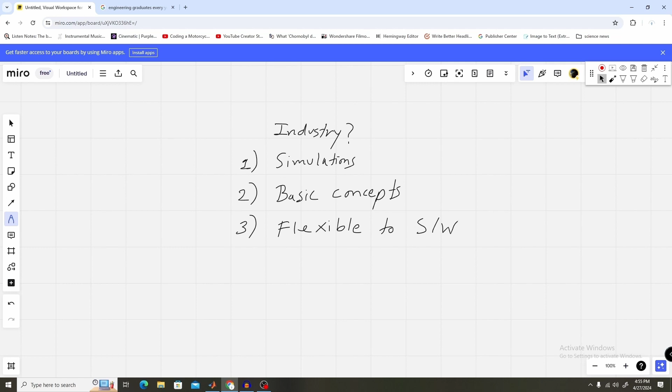Industry wants people who can do simulations. Industry wants people who can understand basic concepts. Industry wants people who are flexible to learn any software needed for that industry. So how can you achieve these concepts, and why is the current education system not able to deliver this to pass-out graduates in engineering?

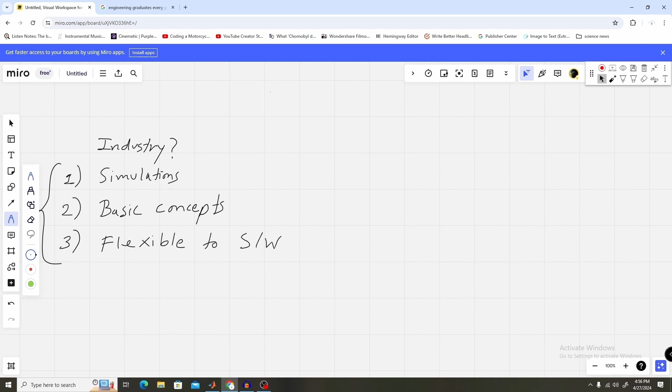For that we need to see what is lacking in our education system. First, simulation is not given that much importance in academics. Whenever we are taught simulation in engineering classes, we are made to follow just some predefined practical things in the labs.

Generally, students copy each other's practicals or their seniors' practicals and just pass out. But they don't understand the importance of that simulation or how it is used. They just consider it a software which has no importance at all.

In the education system, we need to put stress on simulation—how an engineer thinks and does simulations—that they need to understand first. Second thing is practicals.

In engineering classes, most of the time practicals are performed before the theory is completed in class. So the student doesn't know the theory behind whatever practical he or she is doing. How can they comprehend the concept if they don't know the theory?

Third, practicals are not taken seriously. Generally, in machines class, there are groups of students doing a single practical. Out of that group, only one or two students will do the practical and the rest will just follow. In such cases, how can we expect that everyone understood the concepts and did the practical seriously? Seriousness of practicals is much needed in our education system.

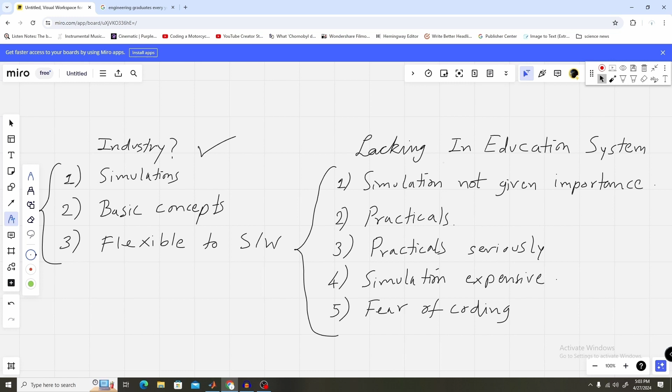The theme of our video is: first we will see a little bit of theory, and then we will implement it in simulation. This series will be part of electrical engineering. I will cover many concepts of electrical engineering in this series, and I hope you will get along with it and be strong with the basic concepts.

In electrical engineering, we say there are two types of currents: one is AC and one is DC. AC, what we call alternating current, and DC, what we call direct current. So how can we understand this concept? What is AC current and what is DC current?

We will understand this with a very practical point of view. Suppose you have a socket, so in home there is a socket or 3-pin plug. What do you get from this 3-pin plug? You get AC voltage. And suppose there is some other plug with two terminals, one positive, one negative, so here we are getting DC voltage.

So in the AC socket, what are these 3 pins? The above one is earth, and below, two pins, one is phase and one is neutral.

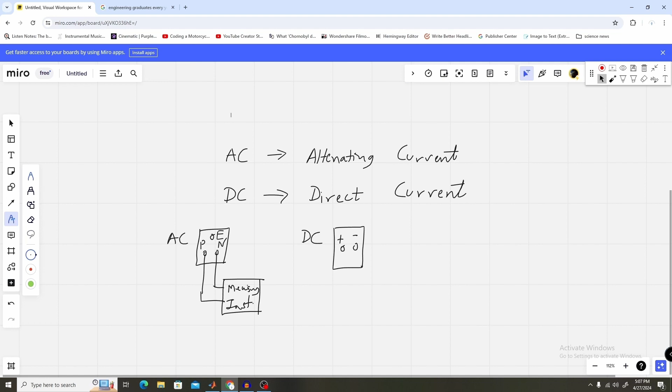What we will do is put some kind of measuring instrument here. This instrument will show us what type of waveform we are getting at this terminal. Similarly we will do the same for the other, so this is some measuring instrument, and here if we see, this is the screen of that measuring instrument.

So what will we get? We will see a waveform that is oscillating along the x-axis. This is the voltage waveform which we are getting between the P and N terminals. Similarly, if we see it here, what will we get? Will we get a waveform? No, we will get just a straight line.

In the DC socket we will get just a straight line, and in the AC socket we will get an alternating waveform, or in terms of mathematics, this is a sine or cos waveform. Here the x-axis is the time axis, and the y-axis is the amplitude, so the amplitude of whichever quantity.

So here, what is the quantity on the y-axis? It is the voltage. Here it is AC voltage and here it is DC voltage. So this is the maximum AC voltage, and this has a frequency. How do we define this? We define VAC as Vm sine omega t, where omega is 2 pi f, and f is the frequency.

So what is the frequency in India? It is 50 Hz, so this alternating waveform is at 50 Hz. And what is the voltage which we are getting? We are getting 230 volt. Similarly, DC doesn't have any waveform, it just has an amplitude, so this amplitude will be whatever voltage we are getting here — it may be 10 volt, 20 volt, whatever voltage it is.

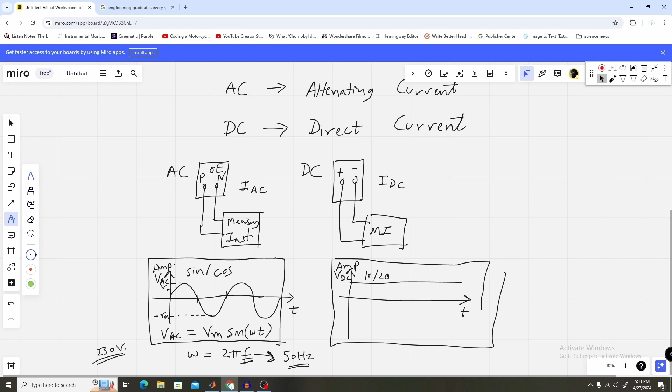Now let's turn to our simulation and see how this AC current and DC current looks like. For simulation, we are using MATLAB software. MATLAB is the matrix laboratory, so here each and every variable acts like a matrix, and we can do very huge computations using this software.

This is called the command window where we can write commands, but for now we will work on Simulink. Simulink is a part of MATLAB, where we can do simulations of different electrical systems.

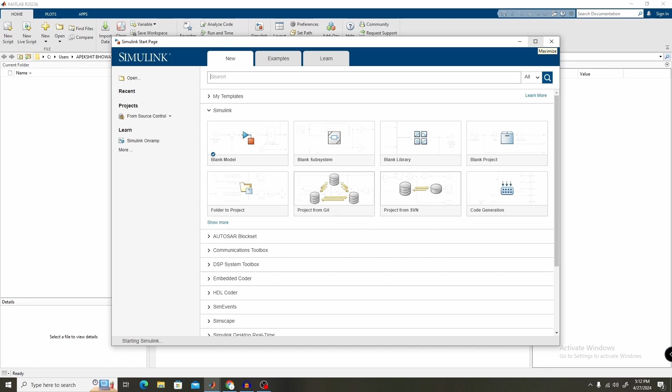So what do you mean by simulations? Suppose there is some engineering problem, and you want to find the solution of this problem. Suppose you want to run a motor at a particular speed, so you want to do speed control of the motor. Now there are different methods for doing speed control of motor, and to do this you will need some kind of hardware.

Before, what people used to do is build a prototype of the problem which would be small in size, and if that works, they would go for production or the final product. But nowadays, what we do is simulate it. We use a software, create the hardware inside it, have a mathematical model of the motor inside it, have the control inside it, and integrate all this inside the software to run the simulation.

What do you mean by running the simulation? We will see exactly what outputs we are getting based on our model, and if there are some changes, problems, or difficulties we find in the logic of our speed control or in the hardware part, then we can change it itself in the simulation.

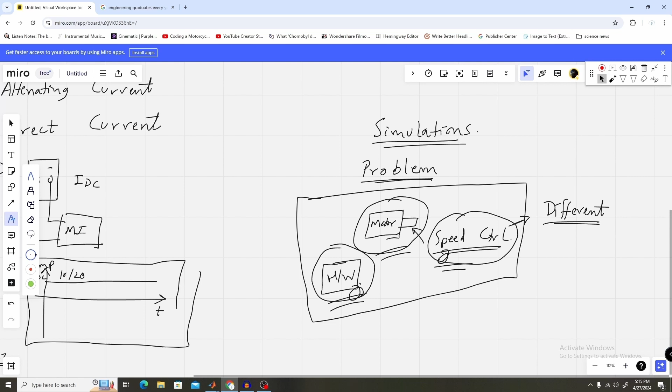Okay, I hope you are getting what simulation is. So let's see practically how we can do simulation. So in MATLAB, this is MATLAB Simulink.

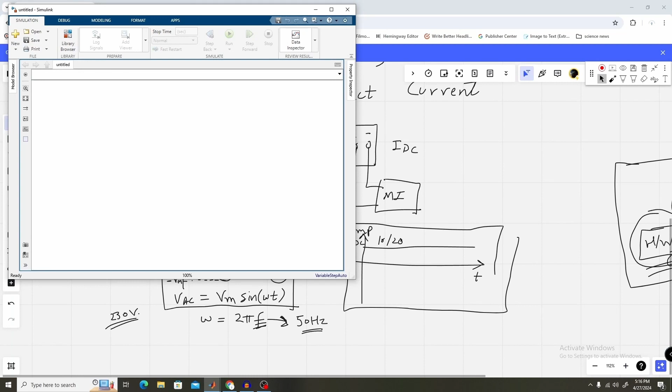Here we will create a blank model. Click on create model. Once this blank model is created, we will add the elements we need. We will create two types of circuits: one is an AC circuit with a load, one is a DC circuit with a load.

So this is a MATLAB environment. Here is the library browser. Go to library browser, then go to Simscape first. Inside Simscape, go to specialized power systems, and inside that, sources. Inside sources you will get AC voltage source. So this is your AC voltage source.

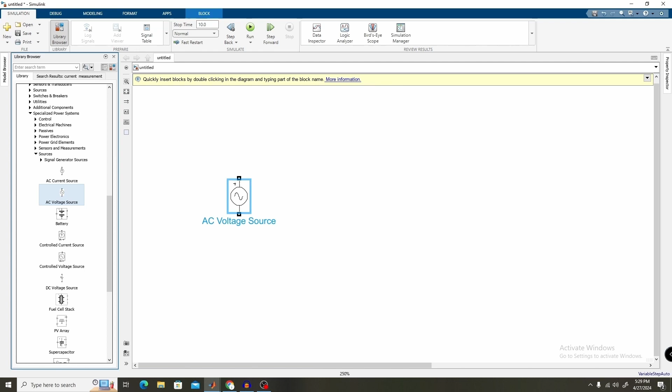Second thing what we want is DC voltage source. So this is the DC voltage source.

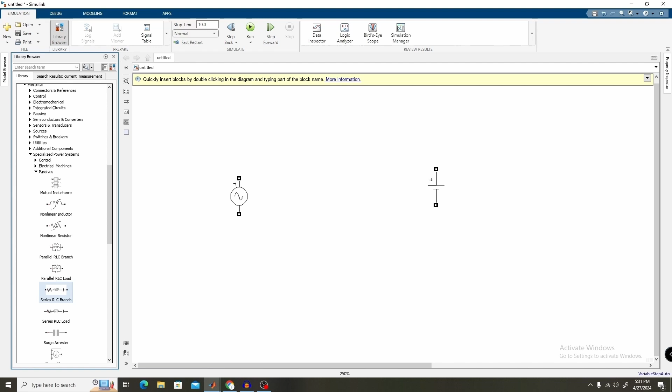So we want some kind of load for this system. We will get it from passive. Inside specialized power system, go to passives, and inside that we can get the series RLC branch. Just drag it. So this is the series RLC branch.

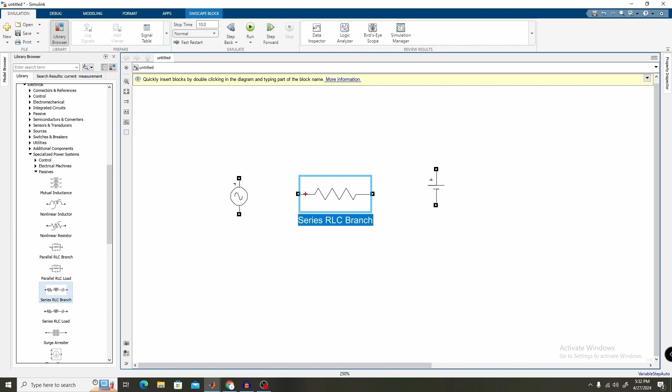Double click on it. From here, branch type, just select R because we want only resistance. Then put the value as 23. Apply. OK, now you see the symbol has changed to only this resistance part. We can name it resistance 1, or better, resistor 1.

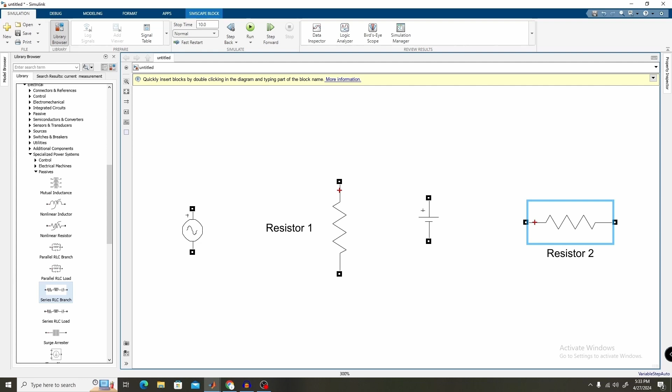We can copy this and paste it here and call it resistor 2. Now we want to rotate this. Right click, format, rotate clockwise, or shortcut Ctrl R. Here also Ctrl R. Now we need to connect this AC voltage source to this resistor, and we want to measure the current going through it.

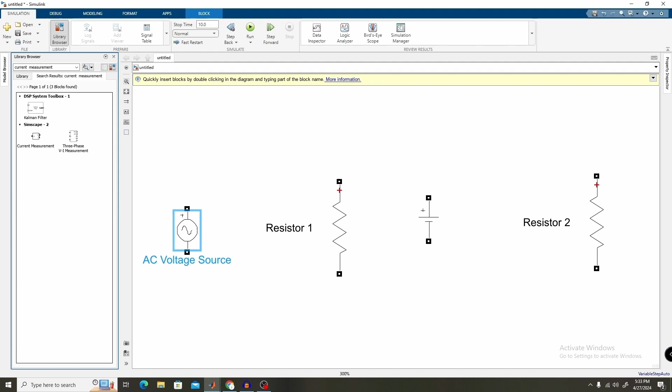So for measuring current, we want some kind of meter, and that meter will be a current measurement block. We can search here for current measurement, and here we get current measurement. Just drag it, similarly to the AC measurement.

Now connect from the AC voltage source to this current measurement, and from this current measurement, the second line, the below one, connect it to the resistor. From AC voltage, drag this line to the resistor. Similarly do for the DC circuit: from positive to here, from negative to here, and from negative to here.

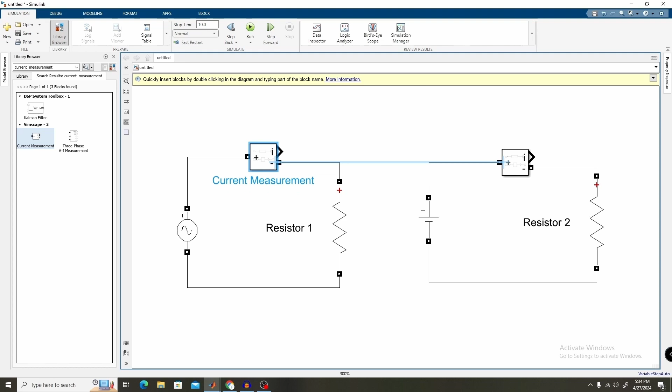Now this is a current measurement. For watching what is inside this current measurement, we want some kind of scope. That scope we will get from Simulink, Sinks, and Scope. Drag this here and here. Now connect from here to the scope and from here to the scope. And that's it, our circuit is ready.

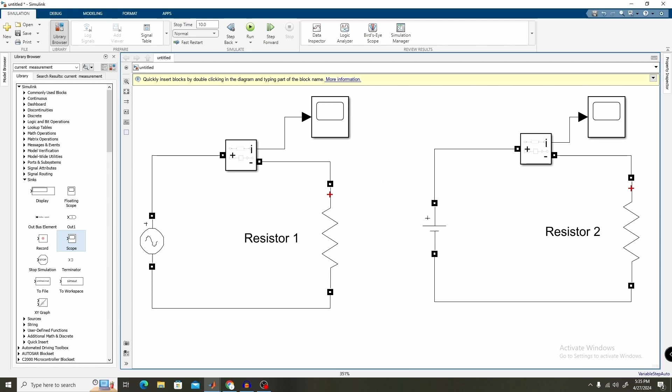Only here, the resistor value, we will change the resistor value for the DC circuit to 20. Now practically we have two types of circuits ready: one is this AC voltage source and one is this DC voltage source.

Okay, so now for running the simulation, what we will do is click here on the run button. Before running, we need to see what is the stop time here. So here stop time is 10 seconds, that means this complete simulation will run for 10 seconds and then it will stop. Just go write it here as 10 seconds or whatever time you want to give.

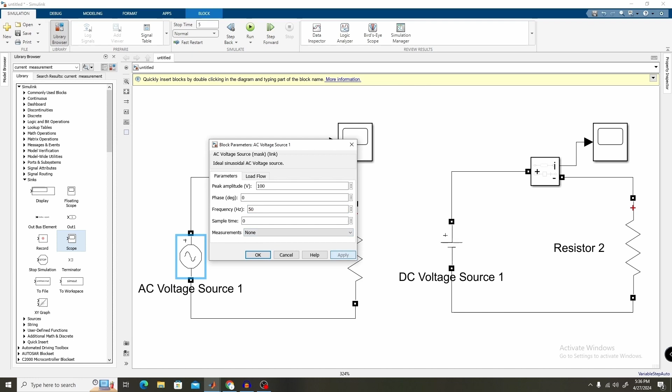Suppose we'll reduce it to 5 seconds. Now before running the simulation, we want to give the voltage value. So here we can give the voltage value as suppose 100 volts, and frequency for Indian frequency is 50 Hz, so we will give 50 Hz. And here the DC source value, the amplitude, is 100. Okay, now we will go and click on the run button.

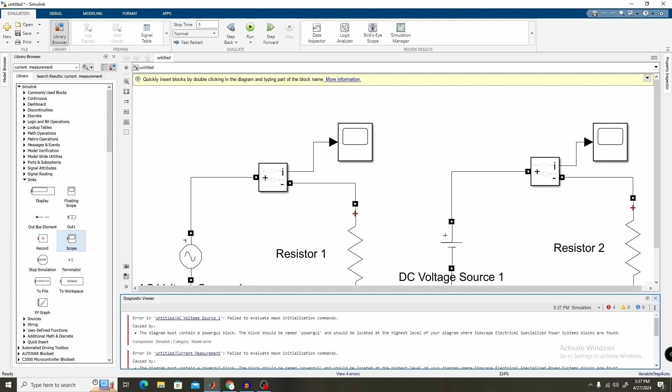Now the simulation has run, but there is some kind of error. It is saying the diagram must contain a power GUI block. Okay, so we forgot to add one block, called the power GUI block. So go to library and search for power GUI. You need to remember, whenever you are running this kind of electrical simulation, you need to always add this power GUI block in your simulation. Okay, now just go and run the simulation.

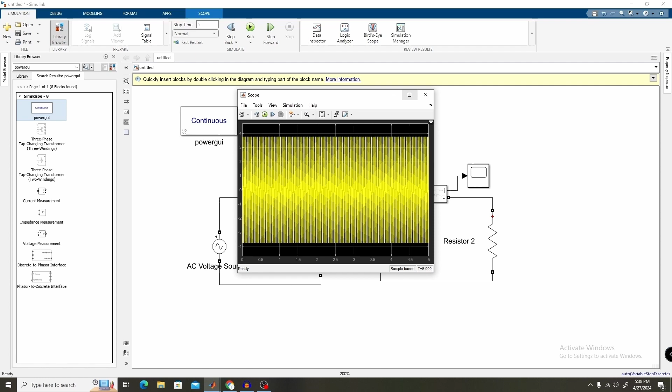So what is expected now? This is for the AC voltage source. Double click on the scope, and you'll see some kind of waveform. This waveform expected is for current—whatever current is flowing through this resistor or circuit should come here. So something we are seeing, but we are not able to see it properly.

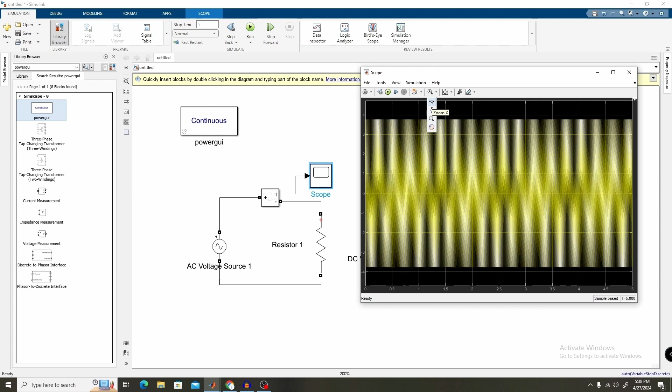To adjust this, go here and click on this. Then go to this zoom button and click on it. Then with this button, you can drag along the x-axis.

Here if you see, we are not getting a proper waveform, we are getting some kind of sawtooth. This is not what we expected, so there must be something wrong with the simulation. In order to correct this, we will change some settings.

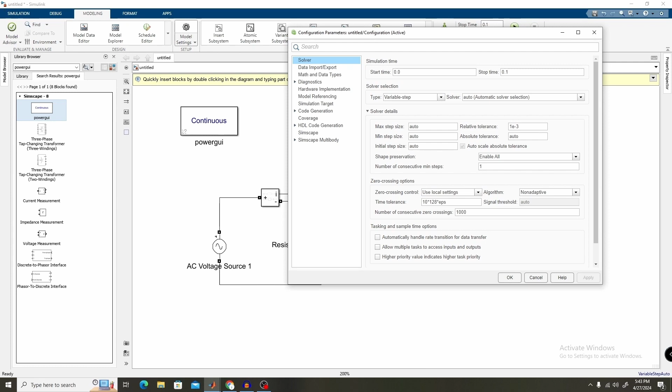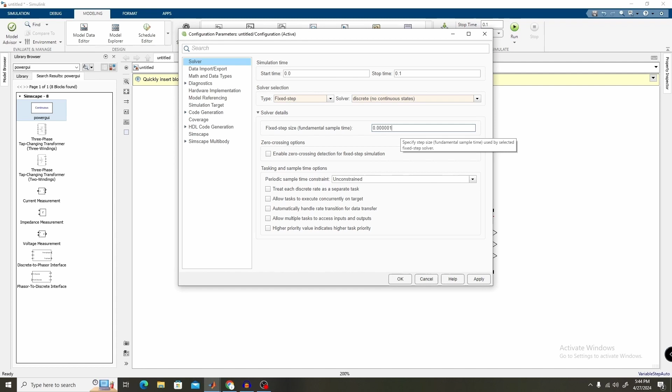To fix this, go to model settings, which you'll find under modeling, model settings. Inside model settings, change the type to fixed step, change the solver type to discrete, and give the fixed step size as 0.000001—that means 1 microsecond. Apply it and click OK. Now go to simulations and run the simulation.

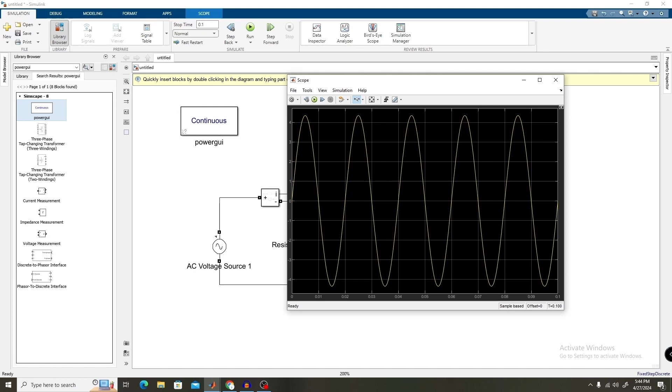Now click the scope. Now if you see, we are getting a sine waveform. I have also changed the simulation time to 0.1, so now we are able to see the waveform clearly. This is the current waveform—for an AC circuit, we are getting AC current, and this is the AC waveform we are getting.

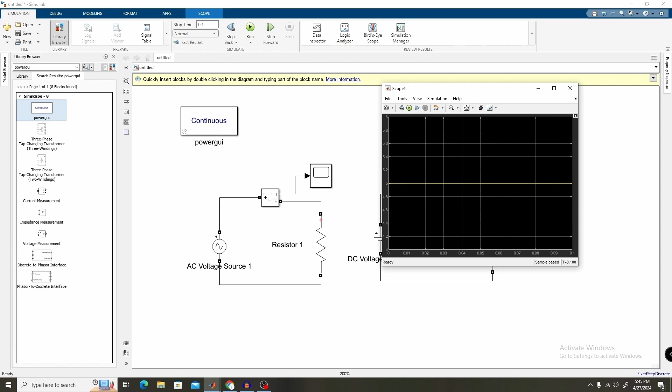Similarly, for this DC circuit, if we open the scope, what are we getting? Here we get a line at 5, meaning this is a DC current at 5 ampere. Why is it coming as 5 ampere? As you know, the DC voltage source has voltage given as 100 and resistance as 20, so 100 divided by 20 gives us 5. So 5 ampere is flowing through this.

I hope you understood that in an AC circuit, the voltage itself is AC, that's why we get AC current. And in a DC circuit, the voltage itself is DC, so we get DC current. Now, how do you determine this current value? What is the relation between voltage, resistance and current? This relation remains constant whether it's an AC circuit or a DC circuit.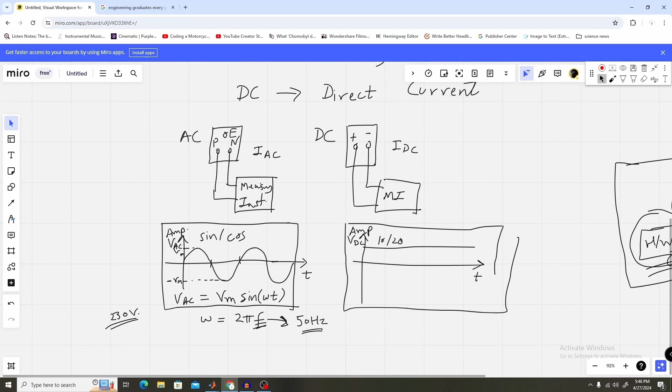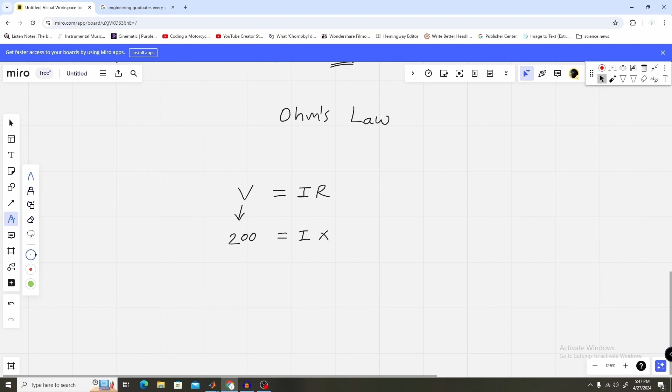So here we come to our first law in electrical engineering, called Ohm's law. Mathematically, theory you will learn in class, but here we will see it conceptually. Voltage is equal to current into the resistance value. So suppose if voltage is given as 200 and resistance as 5 ohms, then the current flowing through the circuit will be 100 ampere. This is how Ohm's law works.

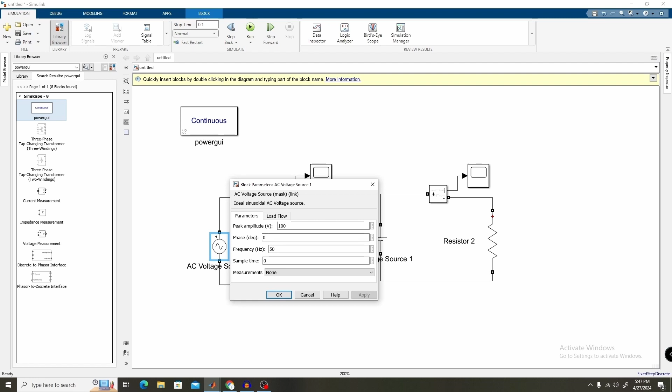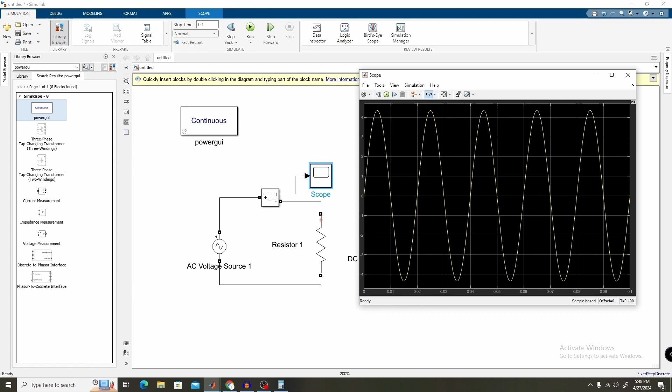If we see practically in our circuit, the voltage is 100 volt and resistor is 23, so 100 divided by 23 is about 4.3 something. If you go to the scope and see the waveform, the max value goes above 4 point something and below minus 4 point something, so this value we are getting. And in the DC circuit, the voltage is 100 volt and resistance is 20, so 100 divided by 20 gives us 5 ampere. This is how practically we can check whether Ohm's law works or not.

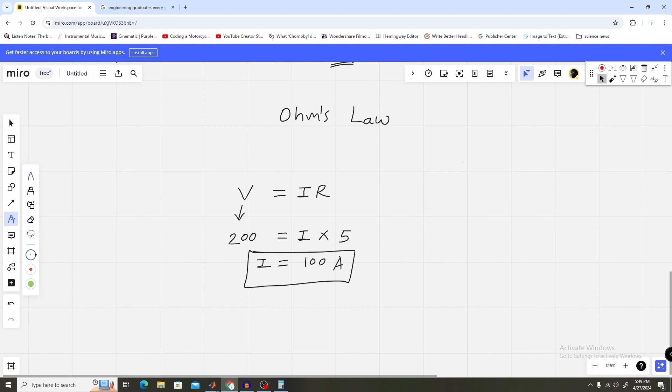I hope you have understood this basic concept and basic simulation. I didn't want to give you too much load in terms of simulation, because this is a new software for you.